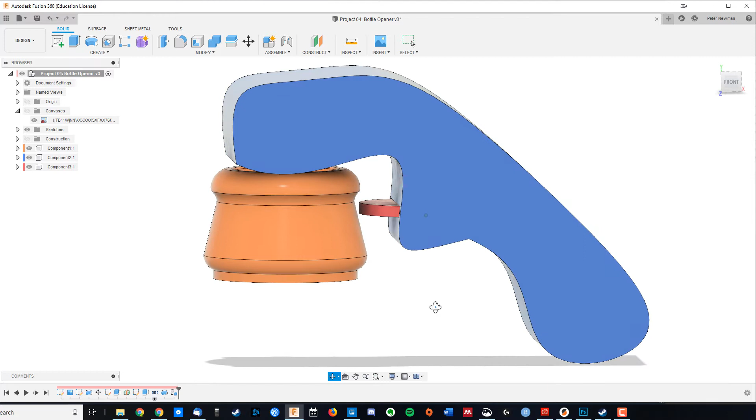Okay, in this video we're going to tackle our fourth project, which is going to be a bottle opener. This is going to be the first project where we start to mix materials, because PLA plastic is not particularly strong. So if you're going to have a bottle opener that's opening metal bottle caps, you better have something metal. So this one's actually going to use a 10-cent coin. This is also going to be the first project where we use dimensions from a diagram to help us out.

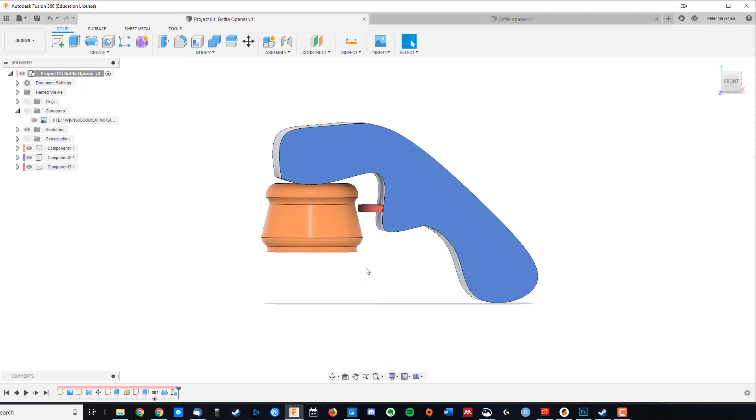So let's jump into it. We're going to start a new design, save it as bottle opener, and go for a sketch, this time on this rear plane here. This time my design is going to be a little bit looser. Basically all I need is a bit of a handle and something to leverage, and of course the slot for the 10-cent coin, and it's really nice to be able to do that organically inside of Fusion 360.

It's really easy, but what's really helpful is to have something realistic. So what I've done here is modeled the top of a bottle. That way we can see if our dimensions are going to be anywhere near realistic.

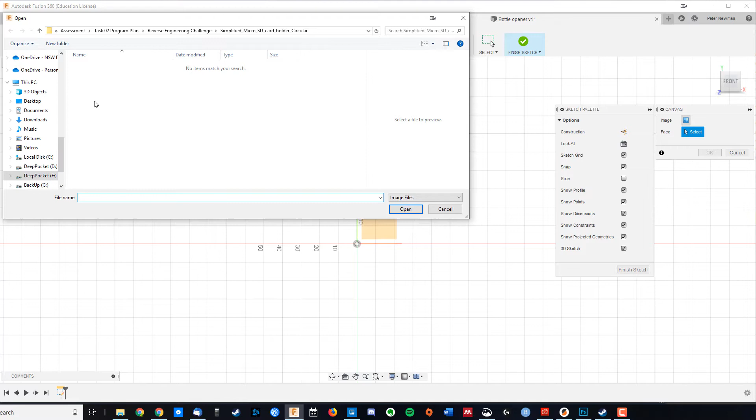To do that, we're going to come back here and use a canvas. So we come up here to Insert Canvas, and we choose our image. The image is in the description of this video, but for me it's in here, there it is. And I'm going to choose which plane that projects onto.

So what we have here is the patent for the bottle. We've got all these dimensions drawn onto it, but of course at the moment it doesn't match those dimensions at all. That's okay, we can come up here to Canvases, and this is really handy.

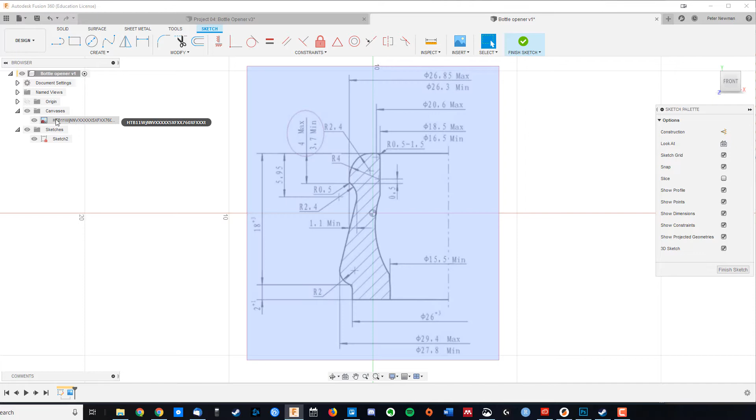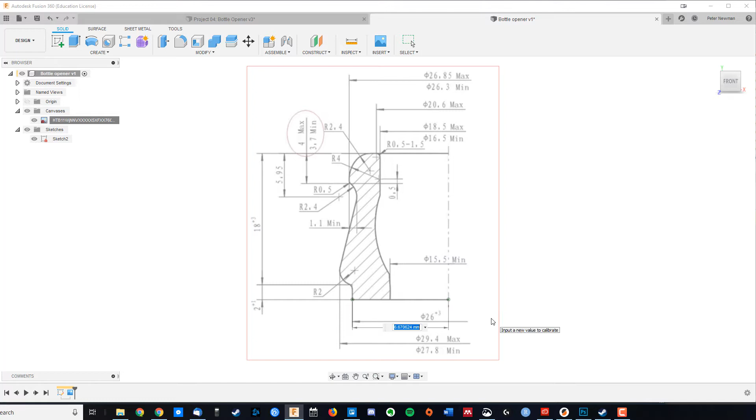We're going to right-click on it and click Calibrate. This allows us to select two points, so I might go here to here, and we can tell Fusion 360 how big that distance should be. Now, this is 26 mil across, so I'm going to enter 13 mil, and now it's resized that canvas to be actually how big we want it.

So we're going to go Finish Sketch, and we're going to create a sketch onto that plane, and what we're going to do is actually draw in this profile here. It doesn't have to be exact, remember it's just a reference.

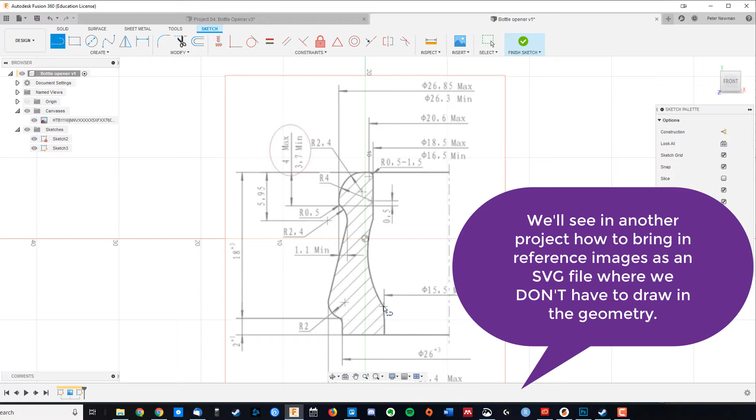So to do this, we're going to use the line tool and just draw in our straight sections here. Remember, it doesn't need to be exact. And line again.

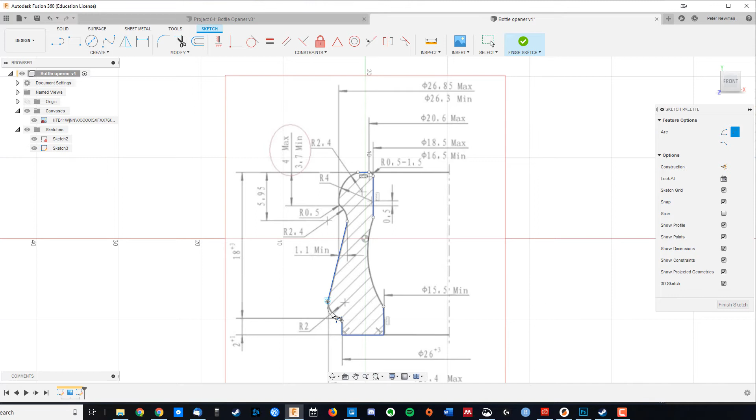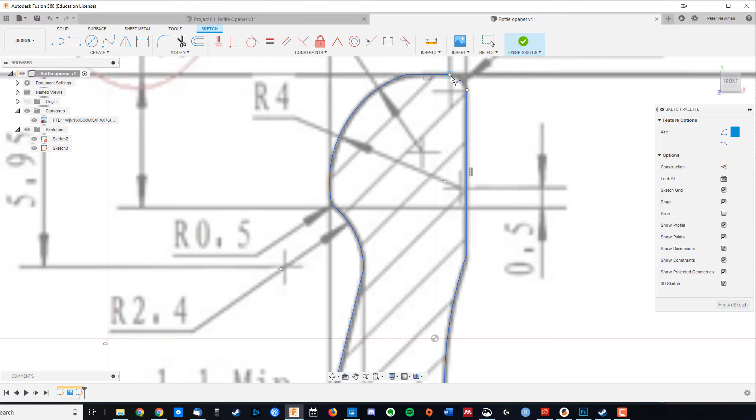Perfect. And now we're just going to use 3-point arcs to finish our design. So from here to here, we zoom in and get some more options. Looks alright. From here to here, again, and we've got a double curve here, so I'll set my endpoint. And up to here. Then the last point, we should end up with a closed shape.

And there we are. Now, the last thing we're going to do is draw in this middle plane here, just like that. And we're going to finish sketch. Now, at the moment, we've just got this profile.

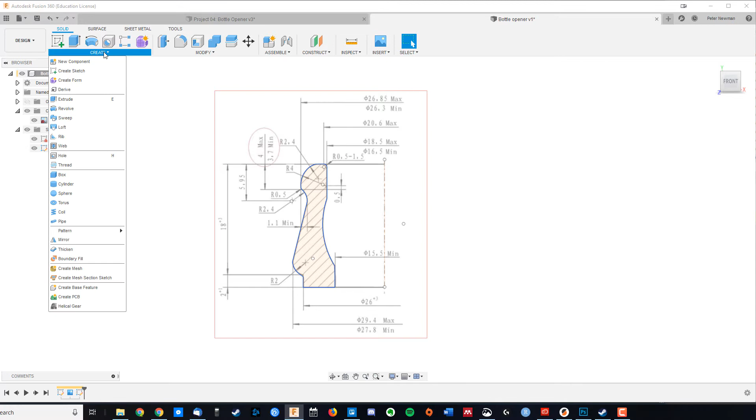What we're about to use is the Revolve tool. So we're going to go Create, Revolve, and we see we've got a profile selected. And now we choose the axis, and lo and behold, we now have our very own bottle top to design around. That looks really good.

I'm going to hide my canvas. Our bottle top is kind of weirdly off axis, so I'm going to go M for Move. I'm going to select my body, and I'm going to go point to point.

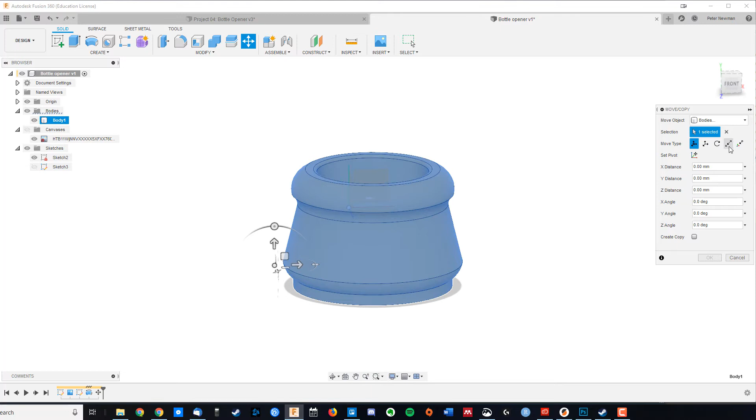Right, this is a really handy thing. Moving it around in 3 dimensions can be a bit confusing, but if I select my origin point as the top of that cylinder there, and my target point as the middle of my origin there, you can see it moves it so now we're perfectly in the center. Now we're ready to start the rest of my design.

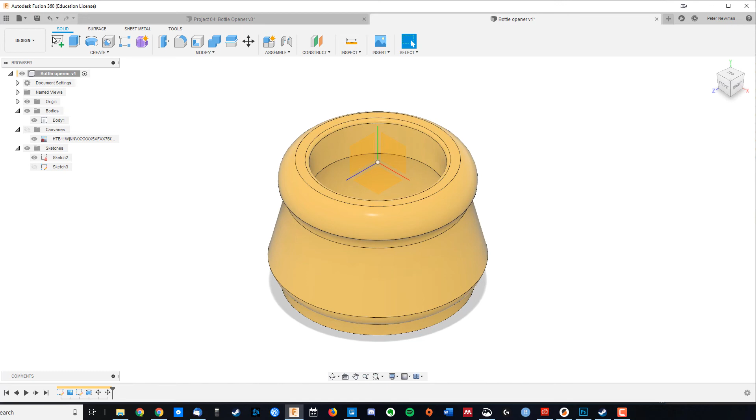What I want is something to leverage at the top, some sort of handle, and some sort of slot for the 10-cent coin to go into. So I'll come back to my bottle opener, and we're going to create a new sketch onto this back plane here. Now I can use this as a reference to vaguely map out what I want to do.

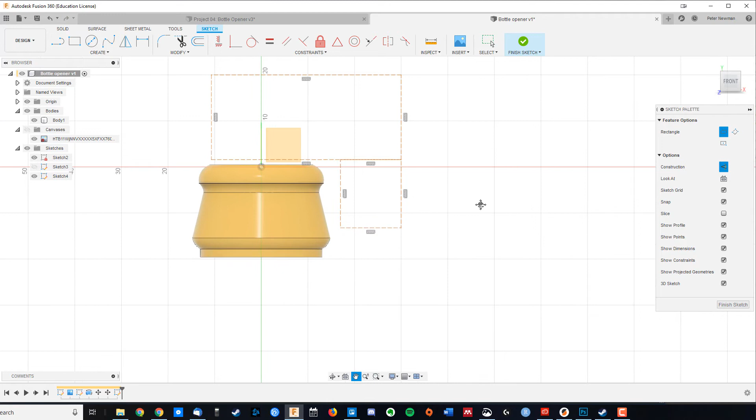So using construction lines, this is quite an organic way of doing things. I know I want something that's going to vaguely go up there, come over here maybe, and then I need something for the 10-cent coin to go into, so maybe we just come down here. And then I think for the handle, I want it to kind of start maybe here and come down maybe that far, get 90-degree turns everywhere, and get a 90 degree there. Maybe it just comes up to there. Looks alright. So it's going to look vaguely like that.

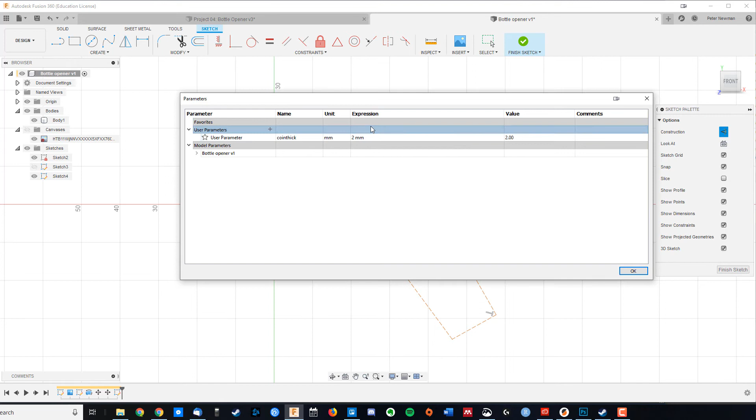I also know I need some sort of coin to go in there, so I'm going to come up here to modify, change parameters, and I know that the 10-cent coin is 2 mil thick, I looked it up. Coin diameter is 23.6 mil in diameter.

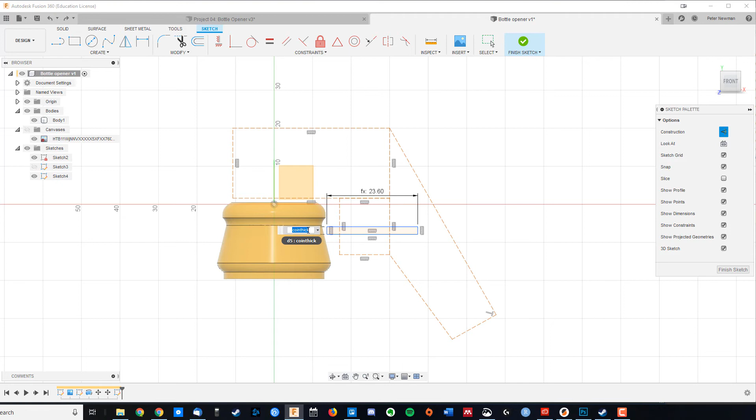So I'm going to draw in a rectangle because this is where it needs to go. I want coin thick there and coin diameter there. Might move it around, let's leave a little bit of tolerance. This is a really nice quick way of mocking up a sketch.

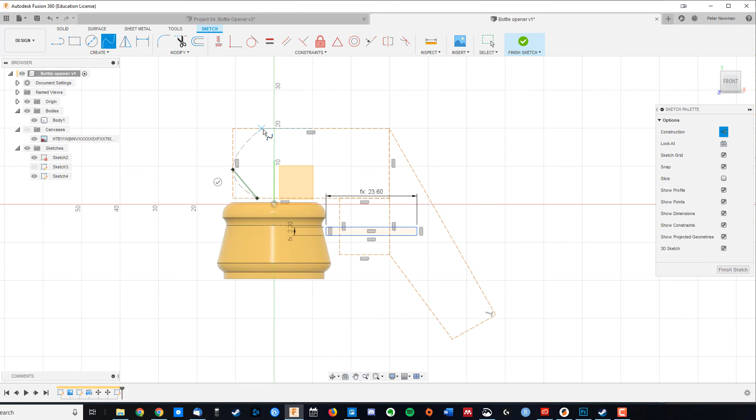So now we're going to fill it out. We've got these lovely curves. The tool we use to make those curves is the spline tool. So, create spline, fit point spline. Now I can basically just put in little handles here and there. Remembering it doesn't really matter how closely I fit to my dimensions here, but that initial curve was just to give me an idea of what it might look like.

You can see you've got these different handles that we can change the curve, and we can add more handles if you like. Hint, adding more handles makes it trickier. Why don't we make this not a construction and finish it off here, and up to here, and something like that, right?

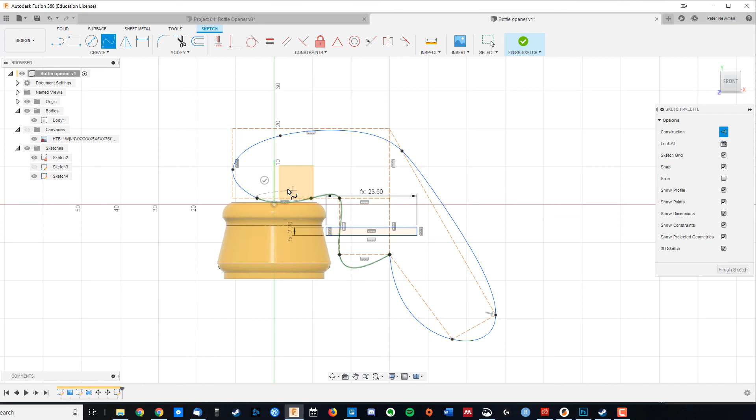I might flatten these bits out because I know that's going to have to leverage off there. Look, I think that's looking okay. I'll just move these up here, give a bit more of a handle shape. This doesn't have to be as far down. But you can decide what yours is going to look like all on your own.

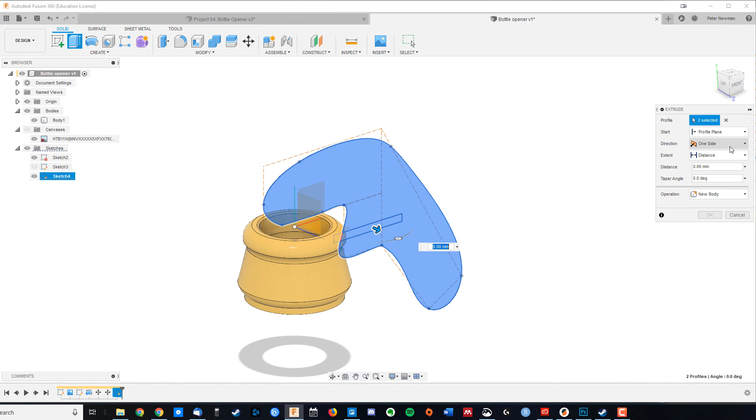Now we're going to extrude it out. In the past we've gone in one direction, this time we're going to go symmetric. I want it to come out so that it's a little bit more than the width of the bottle top, knowing of course that the coin's got to be 23.6 mil.

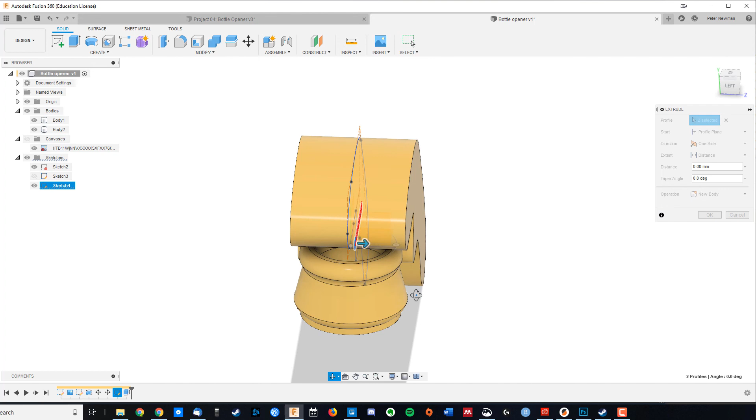The last step is to put back in that slot. So I'm going to come over here, turn my sketch back on, E for extrude, and we're going to come out to coin diameter on two, because of course we're going to go symmetric, and we'll add a bit of a tolerance there.

And there we have it. Right, you've now got your own mixed material bottle opener, done with splines, and using a reference made from a canvas.